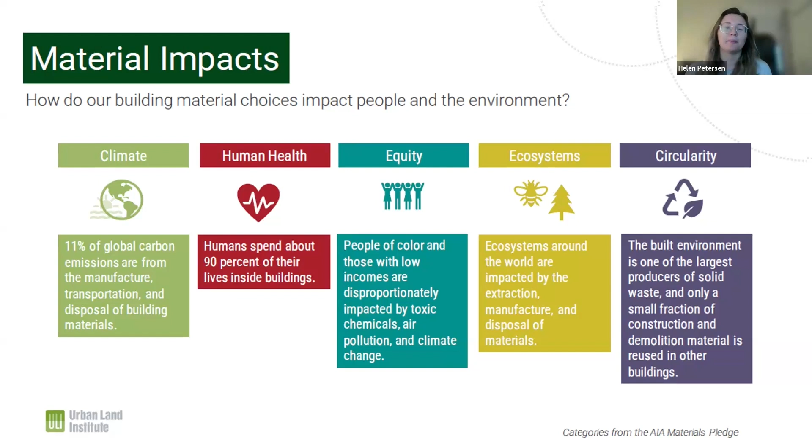So when we're talking about embodied carbon, I just want to remind everyone that we're really talking about building materials and their impacts, mostly as they pertain to climate and carbon emissions, but also how they impact human health and different ecosystems. When we think about the major building materials, we're talking about concrete, and concrete is actually the second most used resource in the world behind water. So it has a very big climate impact, and we are trying to figure out ways to mitigate that.

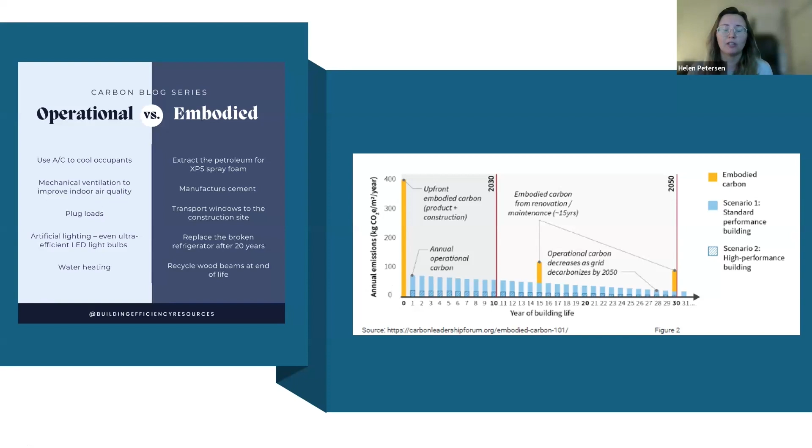So again, building materials and their impacts, those impacts are immediate. They're being realized right now as buildings are being constructed. For a long time, we've focused on operational carbon, which is the energy that a building uses over its lifetime. So that's kind of in this blue area here. But these orange bars are the embodied carbon, and they are a really big impact and something that we can impact now. So that's the focus of a lot of this work that we've been doing.

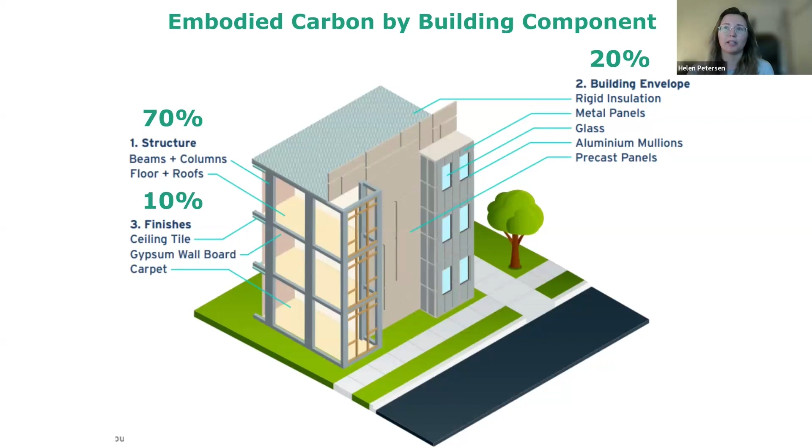And where that impact comes from, most of it comes from the structure and envelope of a building. So the beams, columns, roof, flooring, insulation, glass on the exterior, that makes up 90% of the embodied carbon of a building, and only 10% is in the finishes, the ceiling tiles, wall boards, and carpeting. So most of our focus is going to be on that high impact 90%.

So our first MTAP that we did back in 2023 with ULI, that group came up with an embodied carbon action plan for us. They came out with steps for us to follow on this journey over about 5 years. So near term, focusing on education and awareness, then working to actually quantify embodied carbon in Buckhead and create baselines, then maybe move towards a voluntary reporting program, and ultimately update our zoning code to incorporate some type of embodied carbon reporting and reduction requirements.

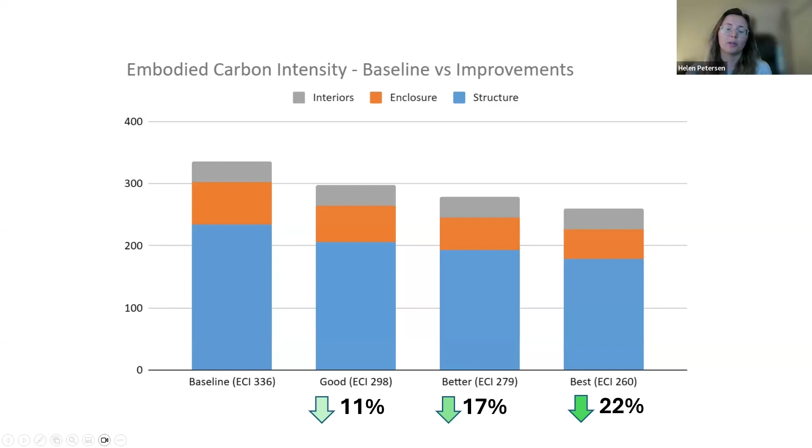So our second MTAP focused on that baseline that was conducted in May of 2024. They weren't able to actually go out and measure every building in Buckhead, but they looked at literature out there and came up with the embodied carbon intensity of a typical building, which is this baseline. And they looked at the simple material swaps or design decisions that could be made that would lower the carbon intensity of the building. They said pretty easy steps could see an 11% reduction in carbon emissions, and going towards the best practices, you can realistically see a 22% reduction in carbon emissions on a per building basis.

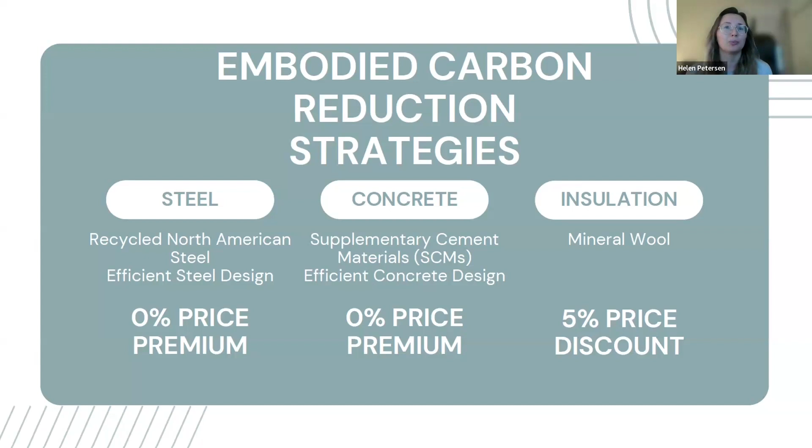They also went out and looked at the availability of these proposed lower carbon materials in the Atlanta market, and we were very encouraged to find that they were readily available and often come at zero price premium. Some things can even be found at a price discount. So it does not cost more money to build more sustainably. So that was all good. It can be done from a technical perspective, but we wanted to see what the community thought about embodied carbon and if this is something that makes sense for us to pursue.

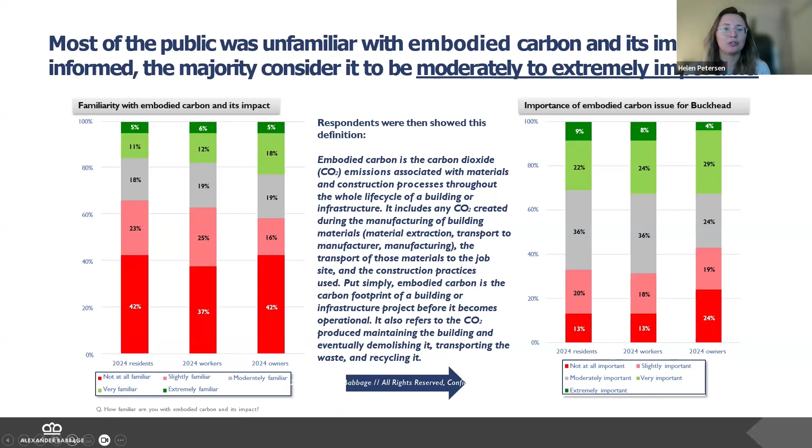So in the 2024 State of Buckhead survey, we asked the public if they were familiar with embodied carbon, and unsurprisingly, most people said that they were not. That's seen here. So then we presented everyone with a definition for embodied carbon and asked them if they thought it was important. And a majority of folks said that it was at least moderately to extremely important. So again, that was encouraging and informed us to continue on this work.

So the MTAPs and what Denise and I have been working on as well is looking at what other cities are doing to address this problem. And it's really been led by cities, not the federal government. So places like Cambridge, Boston, California, Denver, Seattle, New York, they are all putting in place either zoning codes or building codes to require more sustainable building materials.

And there's a lot of excitement around this, a lot of good press where these regulations are in place. There's some really exciting projects going in. So we see this as an opportunity to bring publicity to Buckhead, see some market differentiation, and show that we are interested in bringing in innovative projects and companies that are interested in locating in sustainable buildings.

So, what are the actual policies that these cities are enacting? Most of them fall into two categories: prescriptive and performance-based programs. So prescriptive programs often regulate specific materials like the concrete and the steel, and require more sustainable alternatives, whereas performance-based programs usually look at the building as a whole and require some sort of measurement to reduce the overall emissions of the building, not just for specific categories of materials.

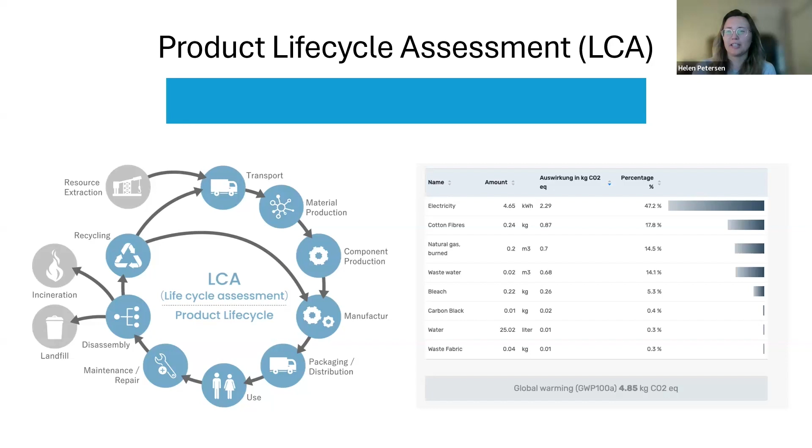So if you're thinking of a black cotton t-shirt, the resources coming for it, the cotton, the black coloring, the electricity going into making it, the transportation, the packaging, all those things add up to a number that's called the global warming potential. So here you can see this black shirt has the global warming potential of 4.85 kilograms of carbon dioxide equivalent per shirt. So that's a life cycle assessment, and that's the global warming potential.

To make it a little bit easier to compare projects or products, the industry has come out with environmental product declarations, EPDs. So these are kind of like a nutrition label for products that show their climate impact. So this is an EPD for a specific type of concrete. Its global warming potential is 271. And so now if an architect is looking to decide what type of concrete they want to use, they can go into a database and look at all the concrete that has these specific performance metrics and compare products based on this global warming potential.

And within these databases, a lot of them will have these kind of box plots where they show the best performing products and the worst, and kind of the middle 50% of where most of the products are. So usually picking a product within this middle range is a good bet. And are those metrics standardized throughout the country? So that is a topic of contention. This is relatively new, so standardization processes are still a work in progress.

Okay. But they are increasing the transparency of the industry as a whole. And as more people are interested in sustainable building materials, more manufacturers are putting out these EPDs. But it does cost money for them to go through this process. So the big players are creating these EPDs. The small folks, they're a little bit lagging.

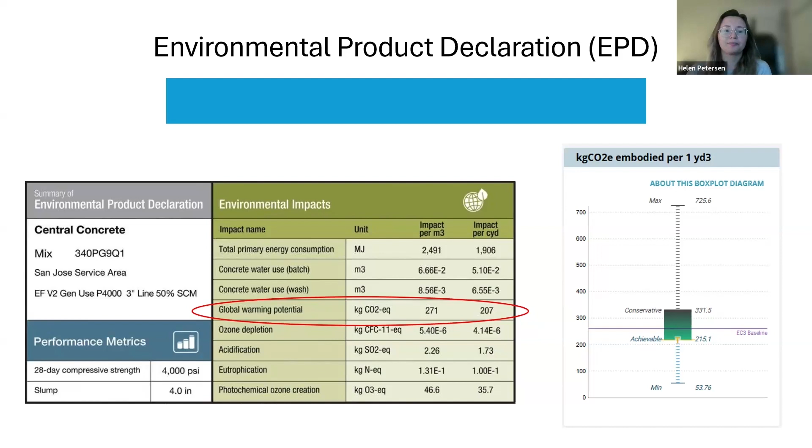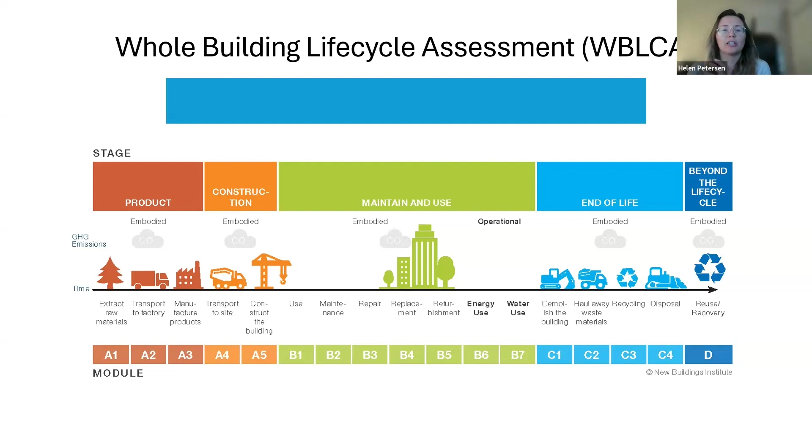So once you have EPDs for all the products in your building, you can then do a whole building life cycle assessment for your whole building. And with that, again, you'll get a single number that is your embodied carbon intensity for your building. And it's usually measured in emissions per square footage. So once you have the embodied carbon intensity of your building, you can then compare your building performance to others.

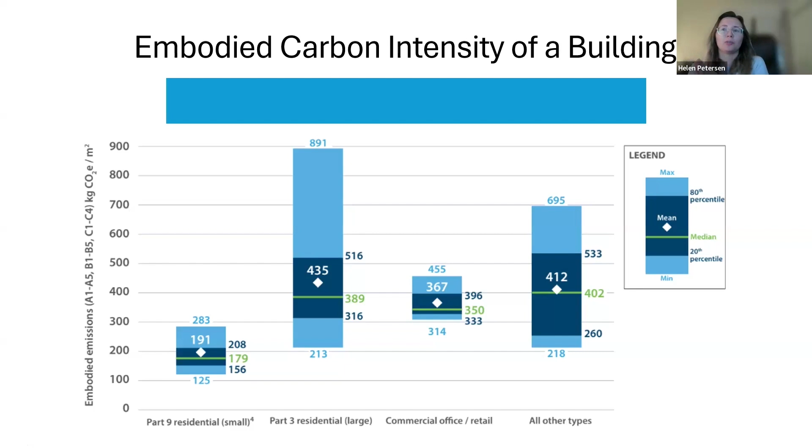So you might have a 20-story building that has a low number per square footage. You might have a small building that has a high one. So this isn't the total embodied carbon in a building. It's just on a square footage basis, but that's what people are using to compare buildings.

Okay, so going back to this prescriptive versus performance, knowing all the lingo that we just went through. So prescriptive programs, like we said, look at specific building materials. So a policy might say you can only use concrete that has a score of 200 or less. That's prescriptive. And then the performance-based says to a building, you can only have a carbon intensity number of 500 or less, but there's more flexibility in how a project team gets there. So they might use some bad concrete, but they use a lot of good recycled steel.

So these two embodied carbon workshops that we've been working on, the goal of them is to determine which of these pathways is going to work best for our community and how we can enforce these policies.